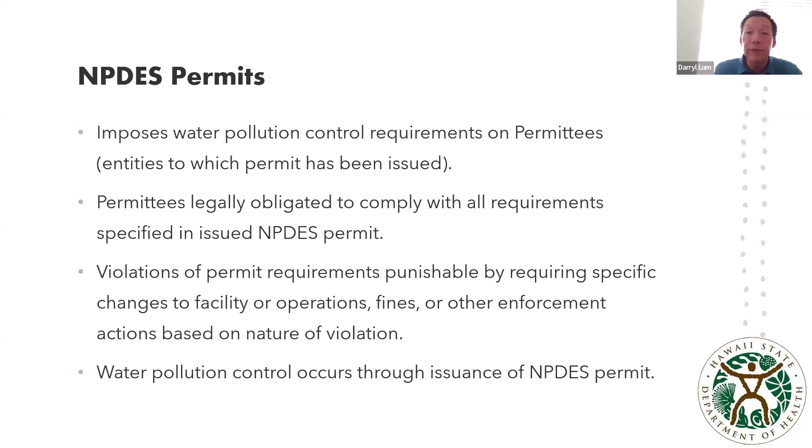So the primary mechanism in NPDES permits for controlling pollutant discharges is the effluent limits. So these are limits on the different types of pollutants that are allowed to be released in the discharge. So before I continue, I just wanted to mention that I'm not going to get into the details of the NPDES permits, but instead I'm going to be introducing some concepts that will help provide you a little bit more understanding and context when we start answering the questions at the end of this presentation.

So there's two types of effluent limitations. There's technology-based and there's water quality-based. So the technology-based, you think of it as limits that are created and have been placed in the federal NPDES regulations. So EPA looked at the different treatment technologies across the nation. They did their different economic analyses. And once they made a decision on the type of treatment that applies to a certain industry, they put it in the federal regs, and these are called TBELs, and they have to be in the NPDES permit if it applies to a certain facility.

The other type of effluent limit is called a water quality-based effluent limit, or a WQBEL. And these WQBELs are limits that are derived from the state's water quality standards. So the federal NPDES regulations require WQBELs in NPDES permits for all pollutant parameters that have a reasonable potential to cause or contribute to an excursion of the state's water quality standards. So in the previous slide, when I mentioned that the NPDES permits are to implement the state's water quality standards, it's done through the WQBELs. And in case anyone's interested, Hawaii's water quality standards are in the Hawaii Administrative Rules, Title 11, Chapter 54.

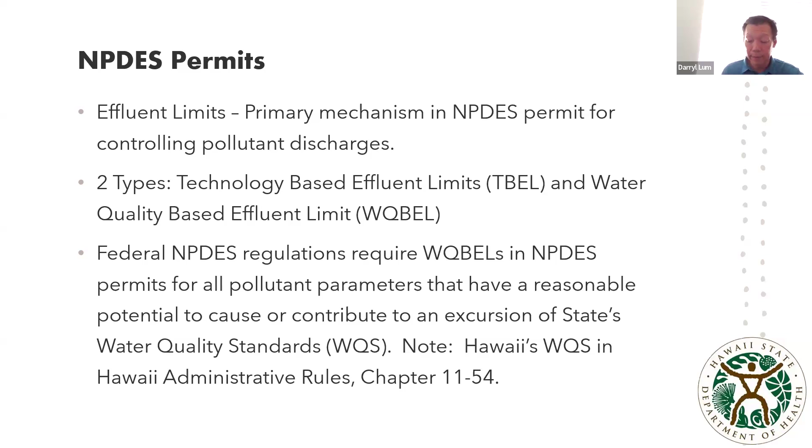So one of the WQBELs that I wanted to discuss is for a parameter called enterococci. And the reason I want to go over this is because this WQBEL is related to some of the questions that we're going to answer towards the end of this presentation.

So a little bit about enterococci. It's an EPA recommended fecal indicator bacteria that's found in high concentrations in the intestinal tract of humans and warm-blooded animals. Enterococci mimics the fate and transport of most common gastrointestinal pathogens as it goes through the wastewater treatment plant. So the idea is after the treatment process, if the indicator is not found, then it's safe to assume that the pathogens will also not be found. So Hawaii's water quality standards contain criteria for enterococci.

And this is in the recreational water quality criteria, which was designed to protect the public from harmful levels of pathogens while they participate in water contact activities. Okay, so we have a summarized version of that, the enterococci criteria, on the screen here. So I'm going to read it, and then I'm going to explain what this means.

Okay, so Hawaii's enterococci water quality standards criteria says that all water bodies shall not exceed 35 CFU per 100 milliliters geometric mean over any 30-day interval, and not to exceed 130 CFU per 100 milliliters statistical threshold value in more than 10% of the samples taken within the same 30-day interval in which the geometric mean was calculated. Okay, so I know that was a lot of words.

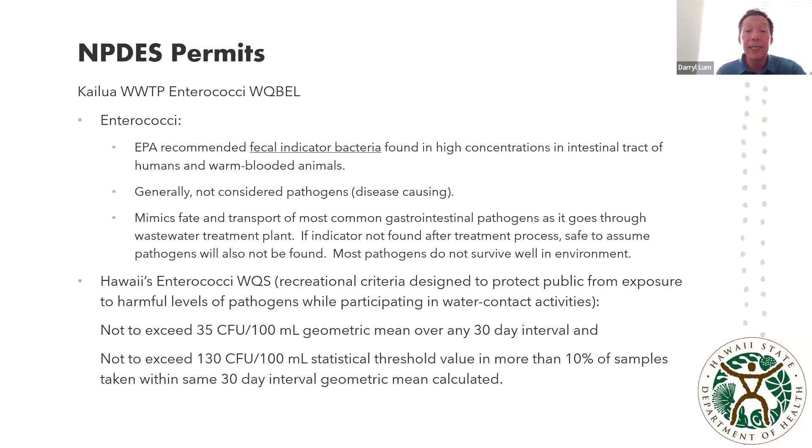Okay, so when it comes to the Kailua treatment plant and all of our wastewater treatment plants, the discharge that comes from these facilities is treated sewage, and it may contain pathogens at elevated concentrations if it's not properly disinfected. So the Department of Health, based upon the nature of this type of activity, determined that reasonable potential exists that this type of discharge would exceed the water quality standards criteria for enterococci. So because of this, NPDES permits for these types of wastewater treatment plant facilities need to have WQBELs for enterococci to ensure human health protection.

Okay, so in the Kailua Wastewater Treatment Plant's NPDES permit, the WQBEL for enterococci is a monthly geometric mean of 25,655 CFU per 100 milliliters, and that's in the yellow highlighted text. And there's a single sample maximum equal to 57,850 CFU per 100 milliliters, and that's in the blue text.

Okay, so the way in which we calculated the monthly geometric mean is we took the water quality standards geometric mean criteria and we multiplied it by a dilution value. And the way in which we calculated the single sample maximum is we took the water quality standard criteria statistical threshold value and we multiplied it by a dilution value.

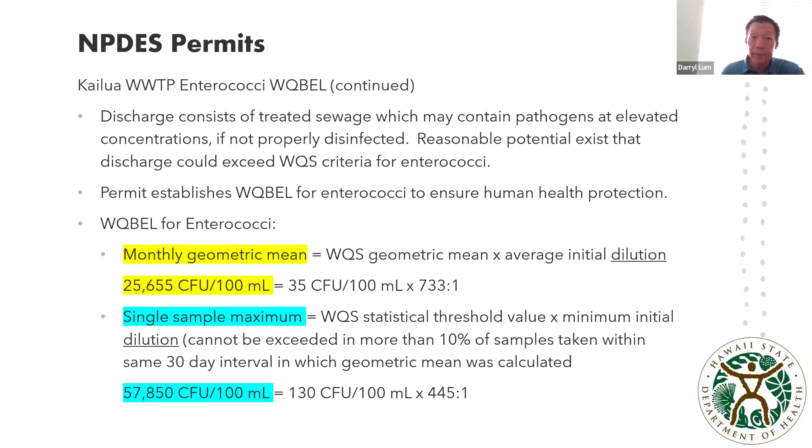Okay, so this dilution refers to the mixing process when the wastewater effluent combines with the ocean water through the outfall diffuser as the treated wastewater is being released to the ocean. In the NPDES permit, there is a tool called a zone of mixing. And the zone of mixing is a defined area around the discharge where some or all of the water quality standard criteria may not be met. And the zone of mixing NPDES tool is to allow for the assimilation of the discharge.

So when a discharger requests this type of zone of mixing, they are required to do computer modeling, calculations, and assessment. And this is how the dilution is determined, through these computer models. And when the Department of Health establishes these zones of mixing in an NPDES permit, we have to do so based on regulations and implementation policies.

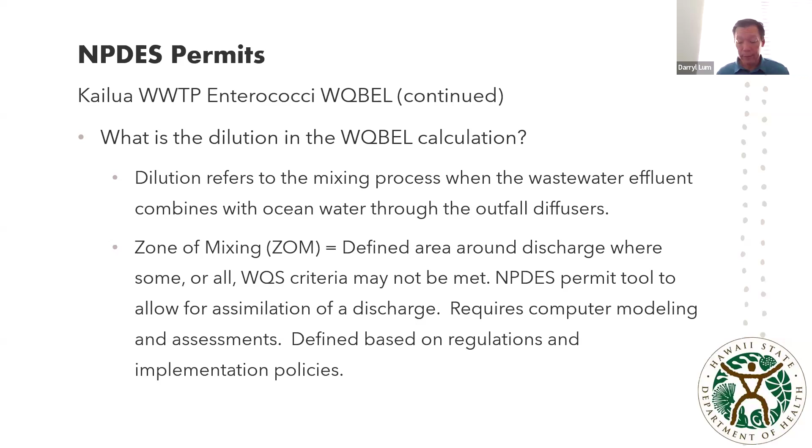Okay, so the reason why we multiply the water quality standards criteria by the dilution value is so that we can back calculate the WQBEL so that compliance can be assessed at the facility and after treatment. So this shows what is coming from the facility and how well the facility is treating the wastewater.

This also eliminates the issues of having to sample in the ocean to determine compliance with the WQBEL, because you could have safety issues in collecting the samples. And you also may run into situations where people are wondering if the ocean water sample contains pollution from everyone else. Okay, so this is the reason why we back calculate the WQBEL so that compliance can be assessed at the facility.

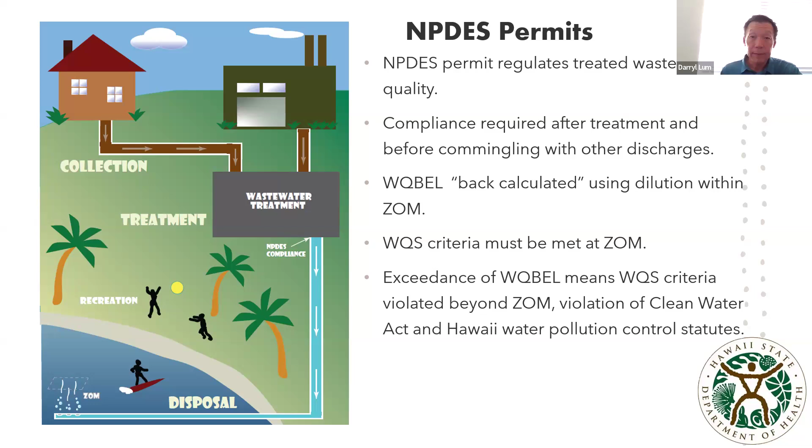Another program that the Clean Water Branch administers is the Beach Monitoring Program. In the year 2000, there was an amendment to the Clean Water Act, and that was the BEACH Act. BEACH stands for Beaches Environmental Assessment and Coastal Health Act. The BEACH Act established national standard criteria for coastal recreational water monitoring and public notification of possible pollution within the coastal recreational waters, or the beaches.

The BEACH Act also authorized the EPA to provide funding to eligible states to implement a water monitoring and public notification program. So Hawaii took advantage of this program, and this is why the Department of Health receives EPA grant funding for the Hawaii Beach Monitoring Program. The goal of Hawaii's beach monitoring program is to reduce risk of illness to users of Hawaii's beaches due to sewage pollution by issuing advisories when warranted for public health protection.

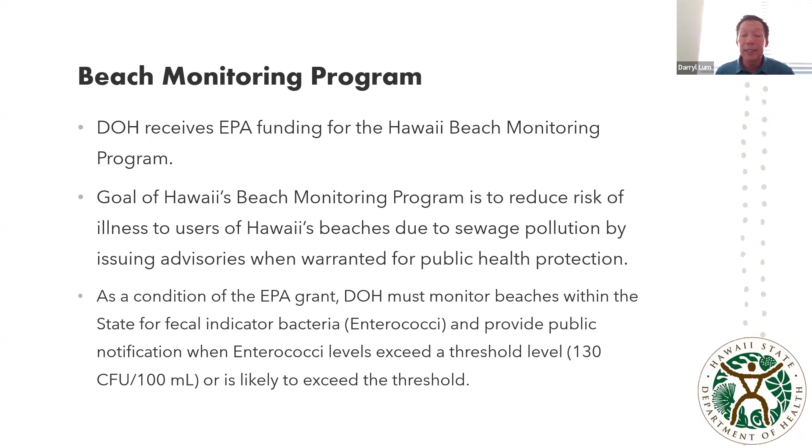And as a condition of the EPA grant, the Department of Health must monitor our beaches within the state for the fecal indicator bacteria enterococci and provide public notification when the enterococci levels exceed a threshold value or when that same threshold value is likely to be exceeded. The threshold value that we chose for the beach monitoring program was 130 CFU per 100 milliliters. This is based on an EPA recommendation, and it also happens to match the statistical threshold value that's in Hawaii standards.

So the Clean Water Branch, we notify the public whenever this threshold is exceeded by using our water quality notification and advisories website. This website has an automated subscription service. So after this meeting, in case you haven't done so already, you can visit the website, you can subscribe, and it'll send you automated email notifications whenever the water quality notifications or advisories are issued or terminated. Okay, so I have the web address on the screen here.

So this slide shows the different advisories and notifications that are on that website. Okay, so there's a beach notification, and this is when our routine beach samples exceed the threshold value, the 130 CFU per 100 milliliters. Okay, and as part of this notification, we inform the public that it's been exceeded, and we also mention that there's going to be a confirmation sample taken the next day.

We also have a beach advisory. So when that confirmation sample is taken, and if it exceeds the threshold, then we notify the public using this advisory. So it's through the beach notification and the beach advisory that we satisfy the first part of the EPA grant requirement, which is notify the public when the threshold is exceeded.

We also have a brown water advisory. Okay, so the brown water advisory is issued when there are conditions that turn the coastal areas brown. So this could be after heavy rain, strong surf, high wind, okay, and the Department of Health has many years of data that shows during this type of brown water conditions, more often than not, the threshold is exceeded. Okay, so we issue these brown water advisories to address the second part of the EPA grant commitment, which is notify the public when the threshold is likely to be exceeded.

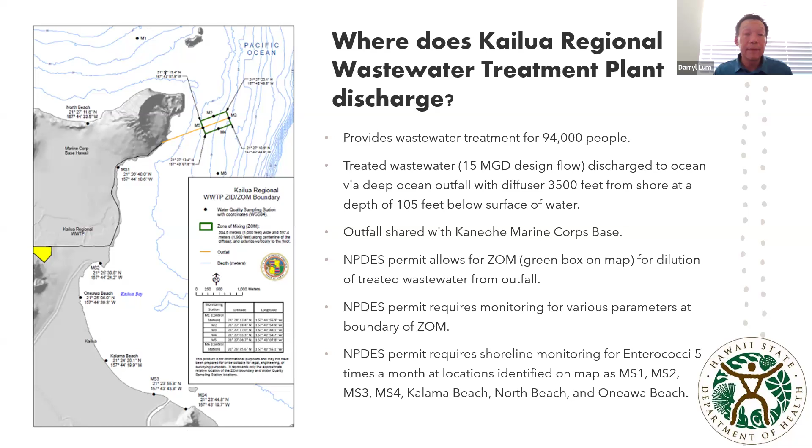So next question. What does an enterococci NPDES permit limit exceedance at the Kailua Regional Wastewater Treatment Plant mean? If there is an exceedance of a WQBEL, this means that the water quality standards criteria has been violated. And this is true for any of our NPDES permitted facilities. The purpose of the water quality standards criteria is to achieve the designated use of the water body. The designated use is the state's goal for the water body. So when you exceed the water quality standard criteria, it means that the designated use has been impaired.

If an effluent limit from the NPDES permit is a WQBEL, an exceedance is a violation of the water quality standards, Clean Water Act, and Hawaii's water pollution control statutes. And since the WQBELs are back calculated so that compliance can be assessed at the facility, we know that because the WQBEL is using the water quality standards and the dilution within the zone of mixing, if you exceed that WQBEL, the water quality standards are not being met at the boundary of the zone of mixing, and the wastewater was not adequately treated.

Next question. What is a permitted facility required to do when there is an exceedance of an NPDES permit limit? The permittees are required to notify the Clean Water Branch of any permit exceedances, usually when they become aware, but no later than 24 hours after the event. The permittees are required to submit to the Clean Water Branch a follow-up report describing the cause of the exceedance and the steps planned or taken to reduce, eliminate, or prevent the reoccurrence.

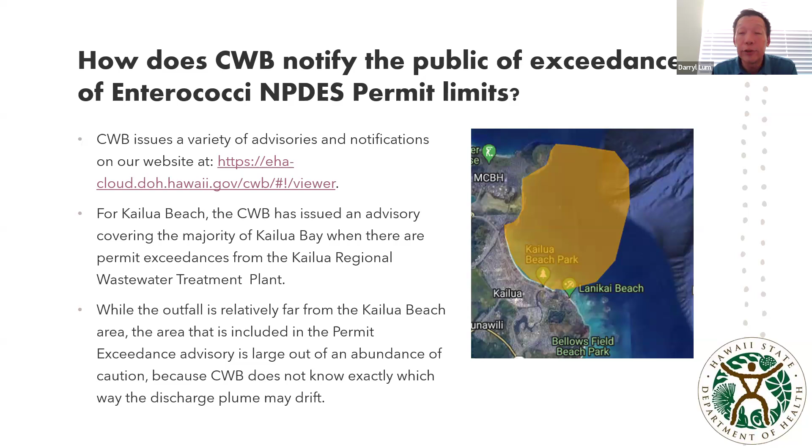And that leads to the next question. What is the thought process behind this? When a WQBEL is exceeded, this means that the water quality standard is not being met at the edge of the zone of mixing. And we don't know the extent or how far beyond the zone of mixing at the time of the violation. Since it's unknown when the effluent limit will be exceeded, it's impossible to predict the time of day, current, wind speed, and the recreational users in the area at the time that this occurs.

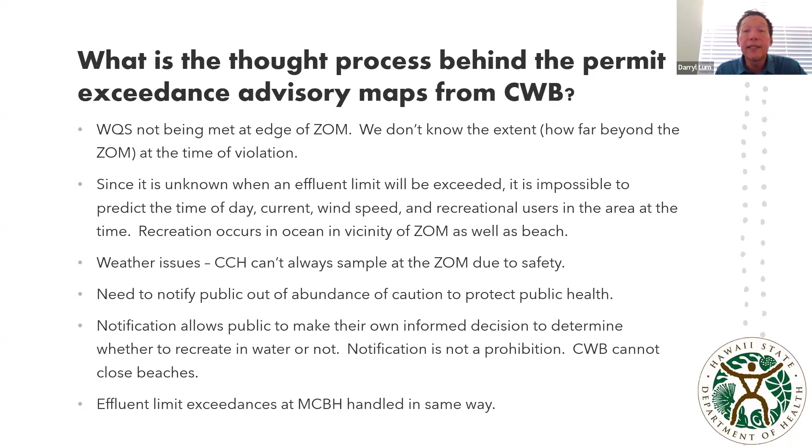There could also be weather issues where the city cannot send their staff to sample at the zone of mixing due to safety reasons. And the Department of Health needs to notify the public out of an abundance of caution to protect public health. The notification allows the public to make their own informed decision whether to recreate in the water or not. Our notification is not a prohibition, and the Clean Water Branch cannot close any beaches. And whenever there is a WQBEL exceedance at the Marine Corps Base Kaneohe's wastewater reclamation facility, the permit exceedance advisory map is handled in the exact same way.

Okay, next question. Why do the Clean Water Branch enterococci shoreline sampling values not always correspond with the NPDES permit exceedances from the Kailua Regional Wastewater Treatment Plant? Okay, so there's several reasons for this. First one is there's dilution and mixing. So the Kailua Treatment Plant's outfall is located approximately 3,500 feet from shore at a depth of about 100 feet deep. And the outfall was designed with a diffuser to induce rapid dilution.

Other factors would include things like wind direction, current, tides, and this affects the direction of the plume from the facility's discharge. This can cause the plume to either move towards or away from the shoreline, which would affect the impact that you would observe at the shoreline. And then the last one is UV radiation. So when the plume is exposed to the sunlight for long periods, this tends to reduce the level of enterococci in the water.

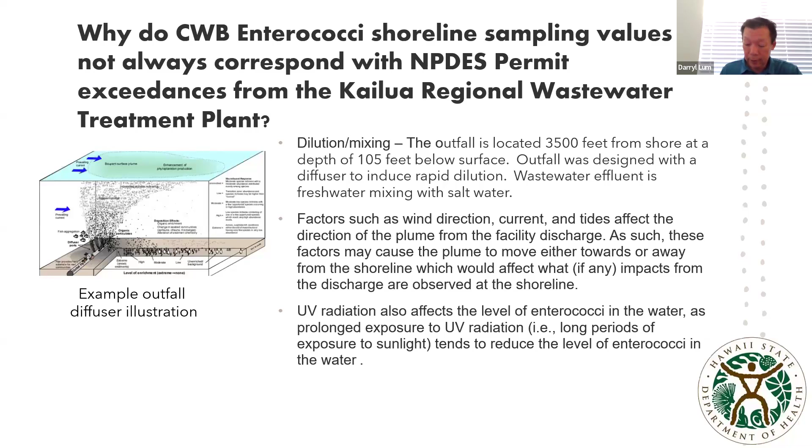Next question. Where can I find Clean Water Branch's monitoring data? In the past, our Beach Act monitoring program data was available on our website for the public to view and download. However, we are in a transitional period where our current system has to be upgraded. Our system was created a long time ago and it used technology that is considered very old, and we were told by the state IT that it represents a security risk. So our current system had to be taken offline.

Our new system is not available yet, so we do not have anything on the internet where people can download the data. But the data is public information. So if you would like to request sampling results from the Clean Water Branch, please email our branch email, cleanwaterbranch@doh.hawaii.gov, with your request, and we will send you the data.

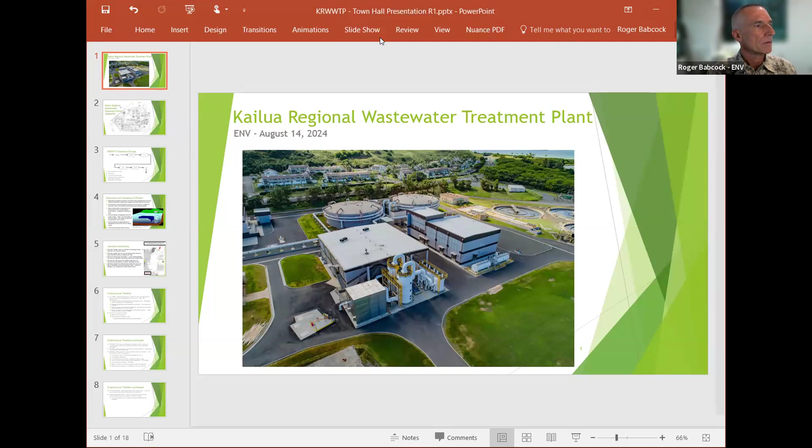Make it do a slideshow. Let's see. Things in the way. Okay, hopefully you can see a nice picture of a wastewater treatment plant. Can you see that, Rep. Martin? You're muted. Can we see that? Are people seeing that? We can see it fine. You might want to go to slideshow so that we see it even bigger. I'm on slideshow and I'm seeing it as slideshow. You're not seeing it as slideshow? We're seeing your small slides on the side. It's not a big deal. Yeah, but if you click that button slideshow, we may see just the slide that you want us to see. Nope. Yeah, it's already showing that. Okay, never mind. Just go back to where you were, resume slideshow. It was fine. Okay, so I'll go ahead.

For some reason it's not working perfectly, but I want to thank Daryl and DOH for being here and making that presentation. As was mentioned, the city has to collect wastewater from everybody and we have to treat it. Our job is to do that very efficiently and effectively in order to meet the requirements of our permits. The goal of that, of course, is to protect public health and the environment, and we take that very seriously.

These treatment plants, this one in particular, are operated 24 hours a day, 7 days a week, 365 days a year, because wastewater is made all the time, every day by all of us. We work very closely with the Department of Health, our partners in protecting the public and the environment. We're always treating all of the wastewater. This treatment plant has never had a spill of untreated wastewater into the outfall going out into the ocean. That just doesn't happen.

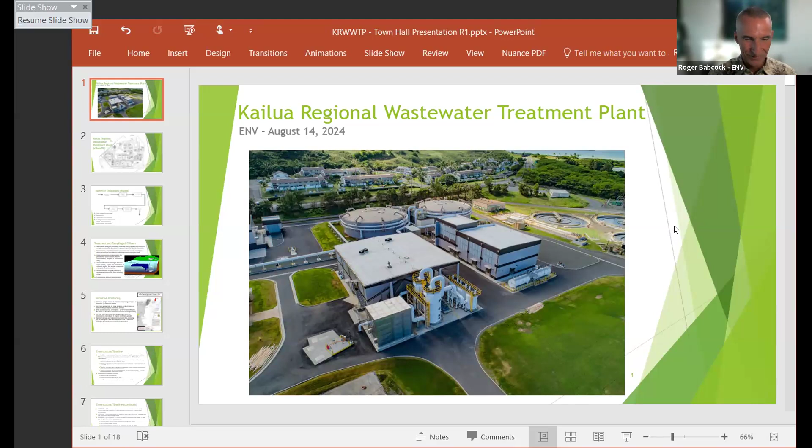Sometimes processes, for various reasons that I'll go over, are not working at their full efficiency, and that's when we can have exceedances. But be assured, we're always treating all the water. So an exceedance is not a spill, and it's not untreated. It's always treated through all the processes that I'll show you. So I'm going to go to the next slide.

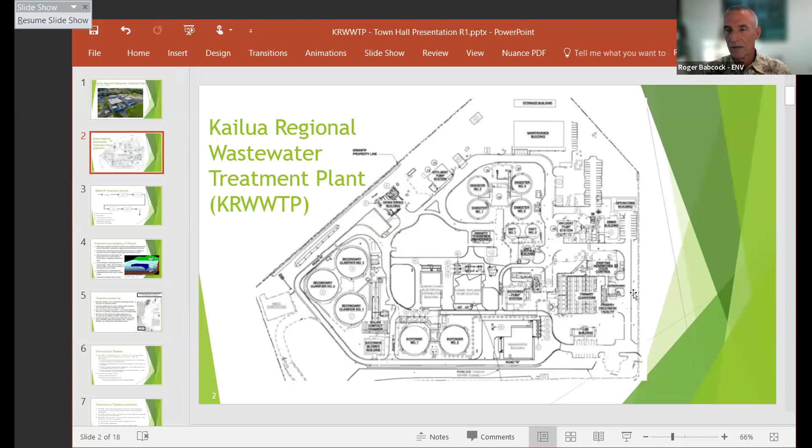This is a schematic view of the treatment plant. It has the shape Daryl showed on his slide from our NPDES permit, the yellow blob on the map. This shows the treatment processes in a simple schematic format. Raw wastewater comes in on the upper left and goes through preliminary treatment: screening and grit removal to remove things like sand and coffee grinds, as well as large objects removed in a screen, similar to a screen on your window.

Then it goes to a primary clarifier, a settling process to remove things that will settle within a couple of hours. Then it moves on to secondary treatment, which is biological treatment. We have biotowers, solids contactors, and secondary clarifiers, all part of the secondary treatment process. At that point we have treated effluent, and that goes out the outfall.

What this plant doesn't have yet, but is under construction, is a disinfection process, located after the secondary clarifier, to directly kill bacteria and other pathogens, viruses, in the effluent before it goes out the outfall. This plant is staffed 24 hours a day. There are 24 operators working different shifts and schedules, and 17 maintenance personnel, and these staffing levels are sufficient for the operation of this treatment plant.

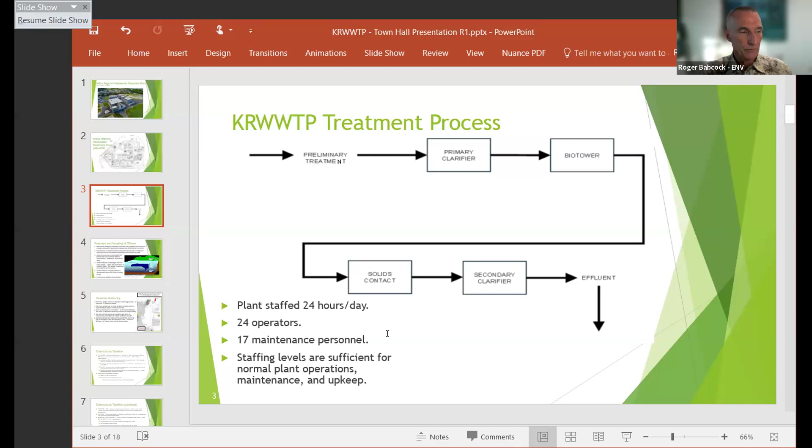A little bit more about treatment and sampling of the effluent. Wastewater that has been treated is sampled and tested for a whole bunch of constituents. Tonight we're talking about enterococcus, but there are many other parameters that have to be monitored as part of our permit, and it is regulated by DOH, as we just heard.

Enterococcus is the bacteria indicator organism, as Daryl explained very well. It is found in wastewater, but it's also found in soil, and it's everywhere in the environment. So the presence of enterococcus does not absolutely correlate with pathogens, and it's not a pathogen itself.

We sample 4 times a week at the effluent monitoring station at the treatment plant. When we find a level above the permit limit, that's called an exceedance, and we notify Department of Health immediately. Sampling then is increased to daily, and it continues daily until we decide that we don't need to do that anymore because we haven't had exceedances.

As Daryl mentioned, it's a point that you might not have caught, but measurement of bacteria is done in a laboratory, and it takes 24 hours to get a result, because what you're doing is you're taking a water sample and you're growing bacteria. They have to grow in order for them to be able to see them and be counted. So you get results 24 hours later for any type of biological sampling.

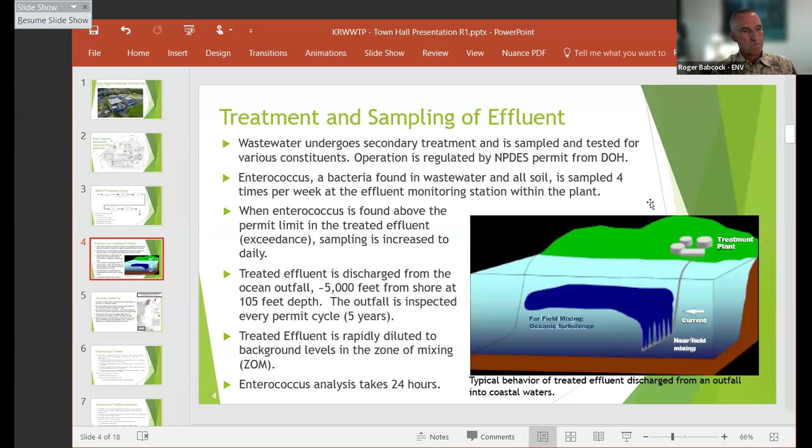You've seen this figure before, and Daryl mentioned that we have seven shoreline monitoring stations that we normally would monitor 5 times per month. We have the zone of mixing stations that we monitor as needed monthly, if it's possible to do that, if we can get a boat out there. Again, if we exceed in the treated effluent, we begin monitoring daily until further notice. Same thing with the zone of mixing if we're able to get out there.

The shoreline samples, it's important to note, as Daryl did too, that they are influenced by runoff that enters the bay. And they're entering at both ends of the bay when it rains. Kaelepulu Canal is not always open, but it does get open when there's heavy rain. Kawainui Canal is always open, but it's not doing heavy discharge except for when there's a lot of rain. But there's something going in and out of there all the time at that end.

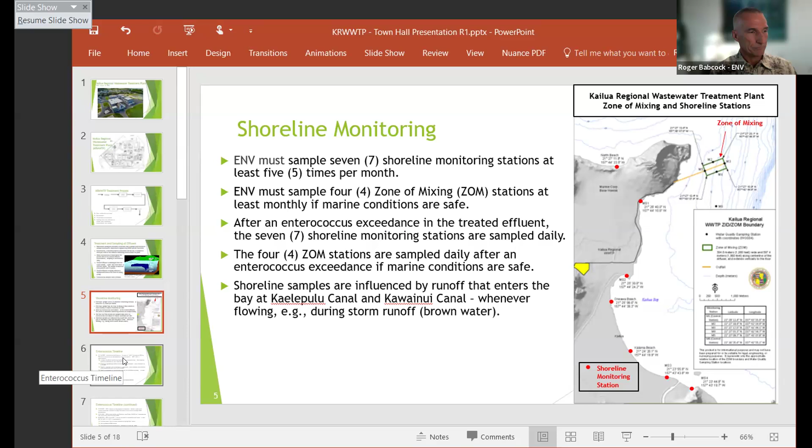So I want to go through a little bit about the timeline of the recent exceedances in 2022 and 2023. So in December of 2022, Department issued what's called an administrative order on consent, an AOC. I'm going to call that AOC number 1. That was actually issued by EPA due to enterococcus exceedances that occurred in 2021. So the requirements of that were us to increase our monitoring frequency from 5 times per month to 4 times per week. And that remains in effect from then till now and going forward until we'll see when that is completed.

So we needed to complete an engineering condition assessment of the treatment plant by April of 2023. We needed to submit a treatment plant enterococcus assessment to analyze the conditions under which exceedances may occur by March of 2023. We needed to submit then also a supplement to the operations manual the operators use that optimized the processes to meet enterococcus permit limits by April of last year. So we did do all those things. We submitted them all to EPA.

And so what did they find? They found that the only thing that's really going to work is for us to install UV disinfection. It did say that some process optimizations may or may not help, and they have some detailed, very technical process parameters. Controlling the flow and adding chemicals may help, but they were not able to find a correlation with those things positively making a difference on a reliable basis. So that led to deciding to install disinfection.

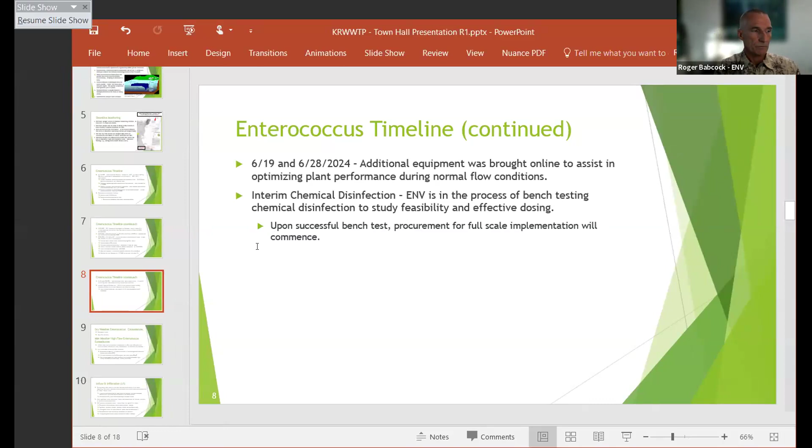If that's successful, then we will have to essentially rapidly try to build a system to make that happen, to be able to add the chemicals. But in the long term, we're not going to do chemical addition. We're going to be doing UV disinfection.

Okay, so why do we have dry weather enterococcus exceedances? That was one of the questions. And what has happened is occasionally we have equipment problems or failures. And so that can cause exceedances for a day. Generally, we get those things fixed very quickly. The other thing is recovering from high flows. So it can stop raining, but runoff and infiltration and water coming into our system doesn't stop for several days because essentially the ground has to drain out.

Under wet weather, flows increase a lot due to what's known as inflow and infiltration into our system. And that can affect the plant performance when flows are much higher than the normal average flows. So when you're running at a very high capacity, the plant performance can be less than optimal. So our tunnel is used during high flow conditions. Actually, it's used all the time, but during high flow conditions, it can store some water to reduce the amount of water coming into the treatment plant.

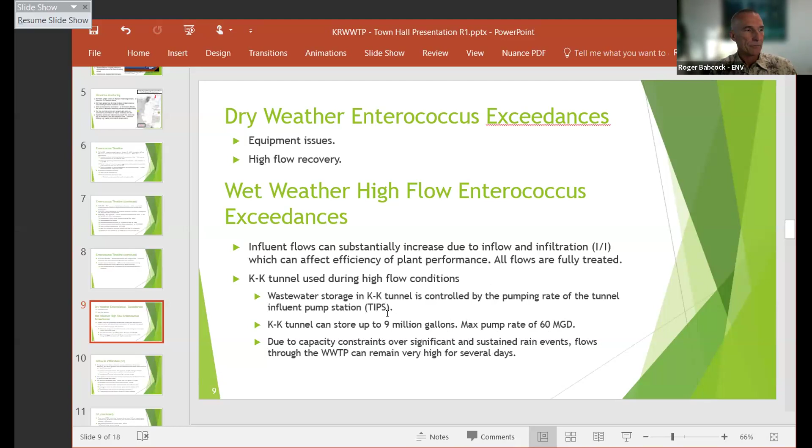And the tunnel stores water, and then we pump the water out of the tunnel and put it through the process. And it can allow us to sort of moderate the high flows. The tunnel can store 9 million gallons, and it has a maximum pumping rate of 60 million gallons a day, which is the amount of water we can put through the treatment plant. And the flows can remain high for several days after a rain event. And then it's called dry weather rather than wet weather exceedance.

So a little bit more about inflow and infiltration. During heavy rain, flows to the plant increase very quickly after it starts raining. Basically what's happening is rainwater is percolating into the soil above and around the sewer pipes, and the sewer pipes can essentially act kind of like a French drain. This is caused by cracks in the sewer pipes and manholes, missing or damaged cleanout caps at people's homes, and stormwater connections to the sanitary system. But we really don't have any evidence of city storm drains connected to the sewer system.

But after a significant storm event ends, it can take several days for flows at the plant to return to normal daily flows. This is one of the questions, we do monitor, of course, our wastewater pump stations. We have approximately 15 pump stations that contribute to this treatment plant because it's a big area. And we can monitor those for signs of inflow and infiltration issues, but that's quite difficult. We do have flow meters on the pump stations, but it's fairly difficult to do.

We do investigations within the basin, which includes something called smoke testing, which you may have heard of, to try and find out where there are large cracks where water can be getting into the system. And one of the biggest challenges we have is inflow and infiltration originating from private property laterals. It's easier for us to find and fix pipes in the city streets that we own. But things that are on private property, we don't own that, and we can't even access those generally.

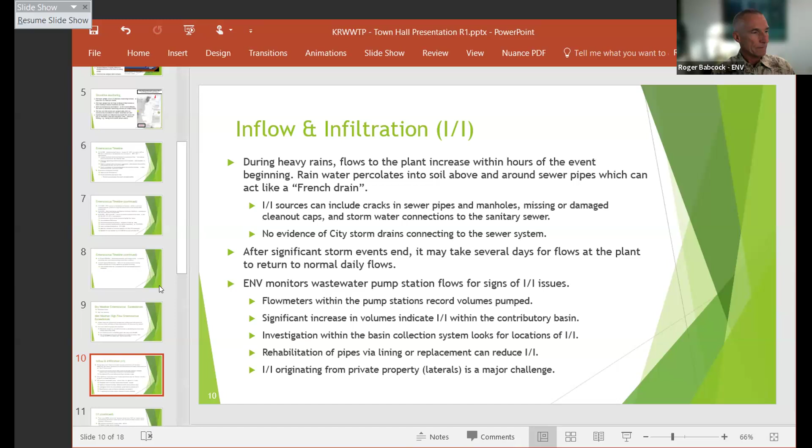Okay. A little bit more about I&I. So since July of 2020, within the KK Basin, we've smoke tested about 40 miles of sewer mains and about 16 miles of sewer laterals, which included about 4,100 parcels or properties. We did discover during that time 286 violations.

When we find a violation, then we issue letters of warning to the residents, and then we escalate enforcement as necessary, to try and ensure that repairs are made. I can't tell you for sure that all 286 of those violations were repaired. I&I tracking is challenging. You can't do it while it's raining because the flows are high everywhere, and it's really hard to differentiate what's I&I from the rest of the flow. But smoke testing is a good way.

We do maintain and upgrade and repair sewers a lot, and we spend a lot of money on it. So we repair, using what's called lining, to reline the pipes to make them more watertight, over 15,000 feet of sewers annually in the KK Basin. And we do that every year, and that's ongoing. It doesn't stop. It's a continuous thing. That's only about 3 miles, and there's a lot more miles of sewer pipes than that. But that's basically the pace at which we're able to do it, because we have a lot of other basins as well.

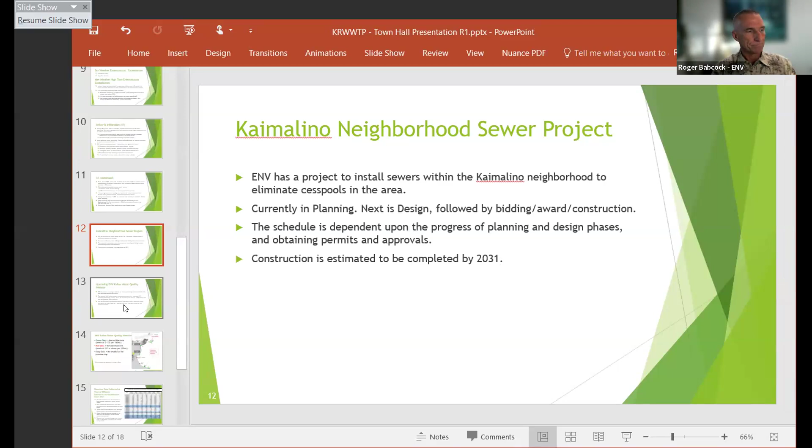A question was asked about the Kaimalino neighborhood sewer project to replace cesspools. We do have a project there, which will add sewers so that cesspools can be closed. It's currently in the planning phase. The next phase is design, followed by construction. When that will happen is dependent upon the progress of those different steps. Those are done by consultants. Construction is estimated to be completed in approximately 2031, but that could change. So that was a specific question asked of us.

Now I want to briefly go over one of the things that we're planning to do to try to provide better and more up-to-date information to the public. So we're creating a web page on our website to share our monitoring results for the Kailua zone of mixing and our 7 shoreline monitoring stations. So we'll display the recent enterococcus results for the 7 shoreline monitoring stations with an archive of past results. Zone of mixing results will be displayed whenever they're available.

We have already increased our shoreline sampling frequency from at least 5 times per month to 3 times per week. And we will continue to do that, and we will post the data as soon as the website is online, which is probably about another week out. This is a draft of what you will see on the new web page. As Daryl showed, it's very similar. You got the treatment plant there in yellow, the outfall pipe, the zone of mixing, and you have the 7 monitoring stations shown here as green, one shown as red, and one shown as gray, to give you a flavor for what the different colors will look like and what they will mean.

So the green dots will mean that in the most recent sample, it was normal bacterial levels, somewhere between 0 and 130 per 100 mils. If it shows red, it means it's elevated, levels of 131 or higher for the sample collected. Gray dots would mean that there were no results for the previous day. As mentioned, the threshold value is 130, so that's the difference between what will define red and what will define green.

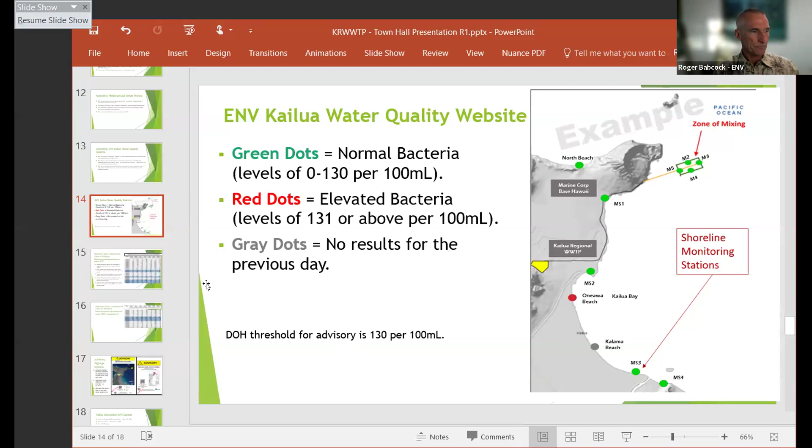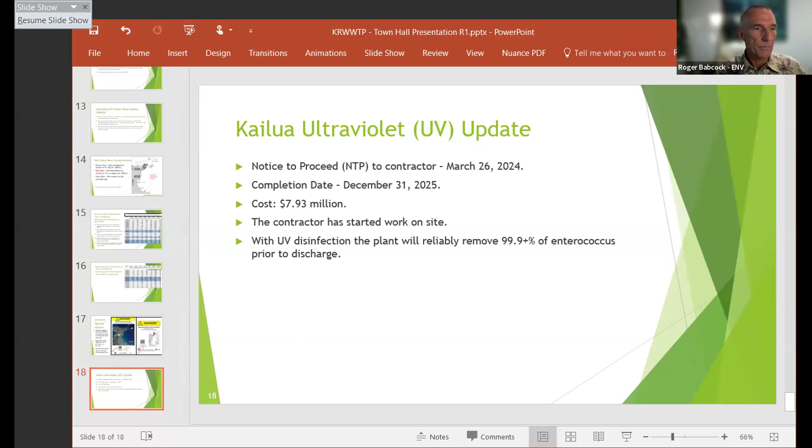Okay, so thank you very much. I really appreciate it. The Committee on Water Quality from the Neighborhood Board sent a whole bunch of questions ahead of time, and you really did address so many of those. There's so many questions that came in. So I wanted to kind of quickly go through some of them, and then we can open it up for people to ask their questions out loud. There were some questions.

Can I just, since you didn't mention this, can I just verify? Is there a bypass valve on the conveyance tunnel from Kaneohe, or is there nothing? Is there no valve there? Oh, sorry.

I'm gonna stop being a control freak so you can unmute yourself. Okay, there. Now I can unmute.

No, there is no such thing as a bypass valve. It's not possible to bypass treatment of any flows at the treatment plant. All flows are always treated through every single process that we have under all conditions. Okay, thank you.

And there's been multiple questions about the exact coordinates of the outfall. Would it be possible for someone from your team or the DOH to put that in the chat? Yeah, we could do that. It's kind of a lot of numbers. It is in the permit, and as Daryl showed, that permit is on the website, so you can get the permit, and those numbers are in the permit on that map that's shown. It has the exact coordinates. Okay, thank you.

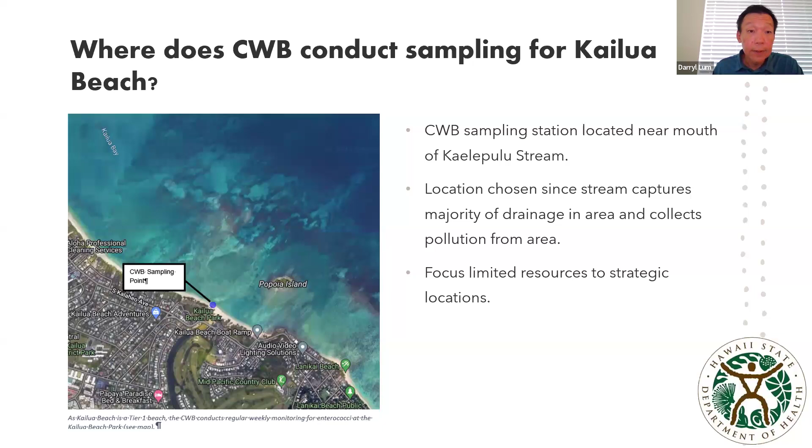Okay, another question says the boundary for Kailua Bay is random. How do we get the notices up in Lanikai as well when there's an exceedance, seeing as this is a high tourist destination? Do we think that this water travels to Lanikai? I don't think so. Oh, go ahead, Myron. Oh, I can get that. Yeah, when we monitor Lanikai, it would have its own advisory. The signs will be posted at Lanikai. Generally, when we see these exceedances, they're localized to the area unless there's a known event. So we don't expect under normal circumstances exceedances from Kailua Bay moving over to Lanikai and vice versa. They're generally kind of localized. Okay.